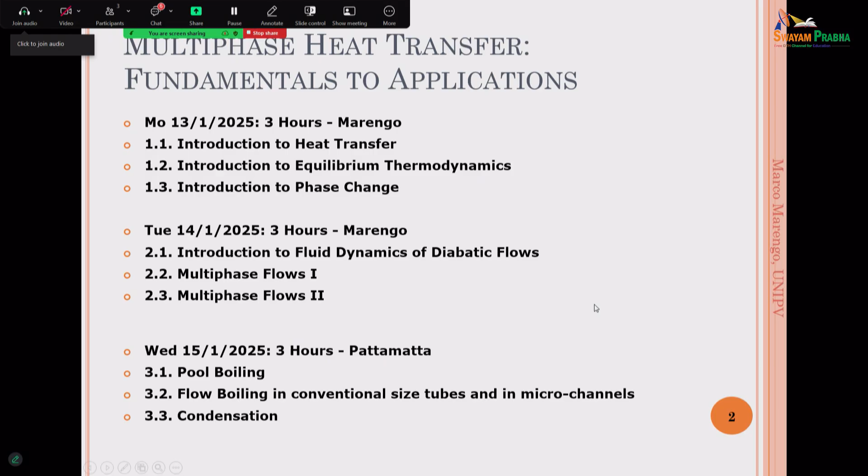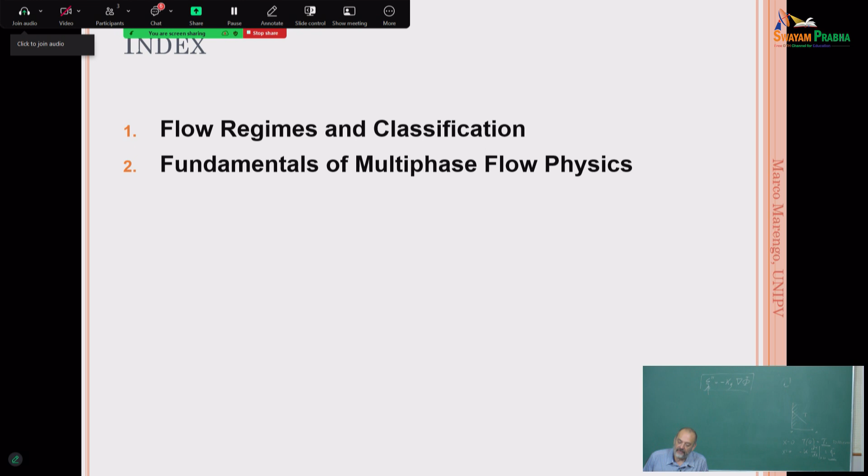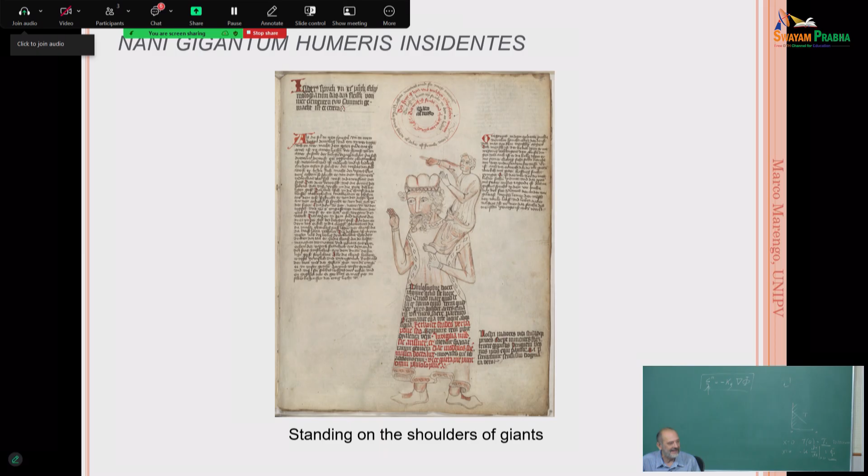So let's start. Very simple. The first lesson is about the flow regimes and their classification and fundamentals of multiphase flow physics. So this is a very important sentence in Latin, nani gigantum humeris insidentes, this means standing on the shoulders of the giants, in English, which is something that I like really very much.

You saw before I used the book of Lightfoot, Stewart, and Bird, and so on. In statistical mechanics, there is a book of Huang that is very, very good for me. And I think that every time that I'm giving lectures, I'm saying, where did I get these notions myself? Because I was a student, let's say, 30 years ago, but 40 years ago. So, okay, I was a student studying all this kind of stuff.

So it's interesting. What is happening here? Okay, in my computer I can see it.

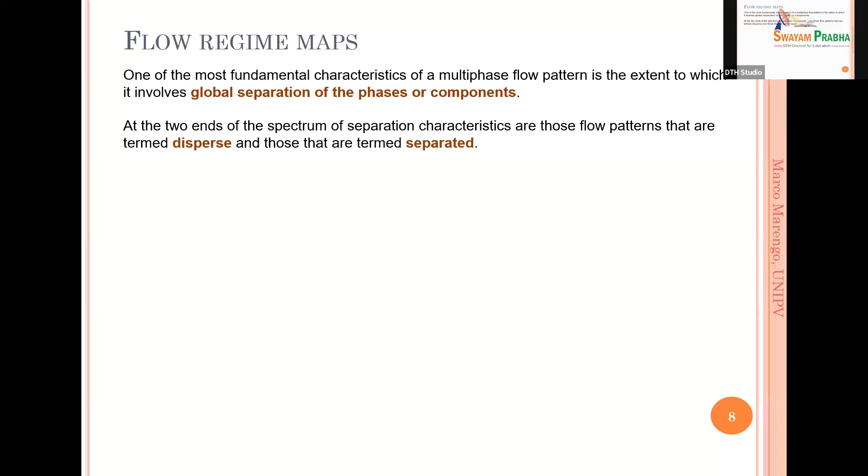So, about the first thing, we need to understand when we have different phases or components, the separation among the phases and the components. Okay, there is a large spectrum. You will learn, I was discussing this before during the break, you will learn that with multiphase flows, nothing is safe and secure and reliable 100%. There is always a kind of gray region of knowledge that we may have.

For example, the classical separation in multiphase flows is between dispersed and separated flows. But again, between these two ends, we have something in between, okay? So, we are starting with the complexity now. But the definition is very clear. A dispersed flow is a flow in which one phase is completely distributed and dispersed inside the continuous phase. So, for example, imagine to have solid particles that are floating in a fluid.

Or you have bubbles in a pipeline, or something. Or you have droplets, like in a spray. You are spraying droplets, and then these droplets are going around and so on, and they are exchanging heat and mass with the environment, with a continuum phase, okay?

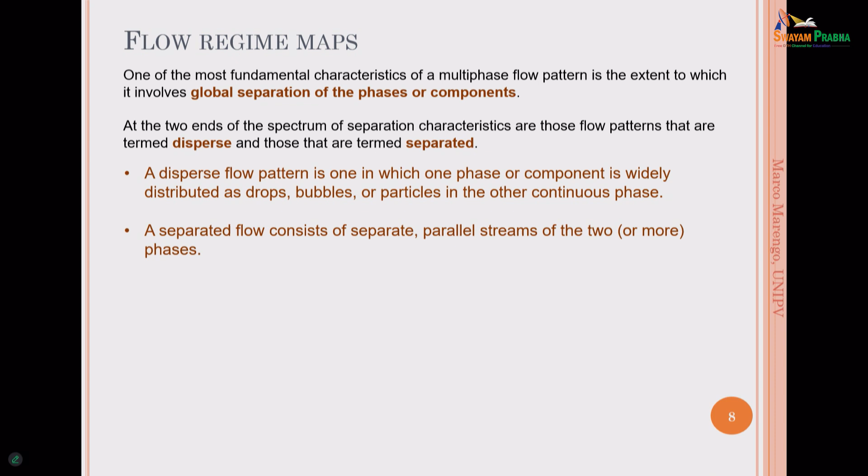And then we have a separated flow, for example, when we have two phases that are separated completely. For example, when we have stratified flows. So they are living almost an independent life. They are separated in this way. So we have a flow, for example, water on oil. So the oil is floating and the water is going in another direction.

And there is something in between, which is the interface, and we are going to study this on Thursday, okay? But apart from it, we can write an equation for the water and for the oil. But pay attention. This is a very simple distinction about the two phases. It's not so easy, okay?

In fact, what we can say, though, is that we have an asymptotic limit for the dispersed flows when we have a very large number of small particles. Okay, imagine to have a lot of nanoparticles in a flow. We can consider this as a single phase, homogeneous flow. Of course, properties will change.

So if you have nanoparticles inside the system, the viscosity maybe is not going to be the viscosity of the main flow because of the presence of the nanoparticles, the heat capacity, conductivity. But we can do an average, and we can consider homogeneous flows like a single flow where we have different properties. This is the asymptotic case of the dispersed flow.

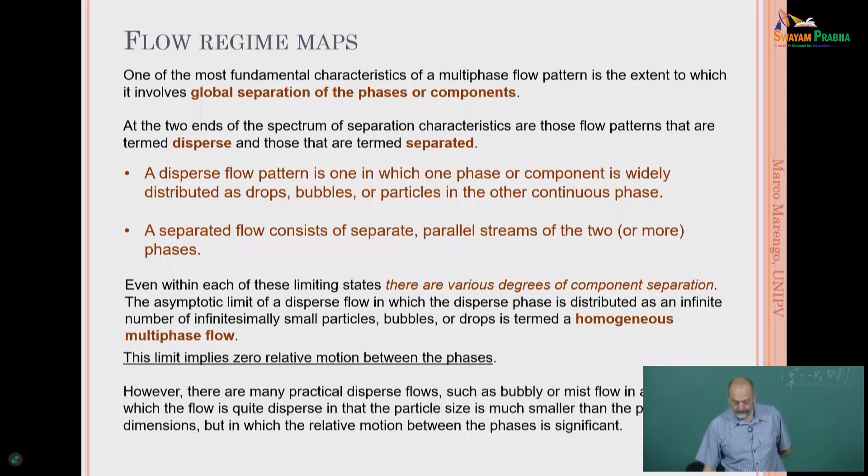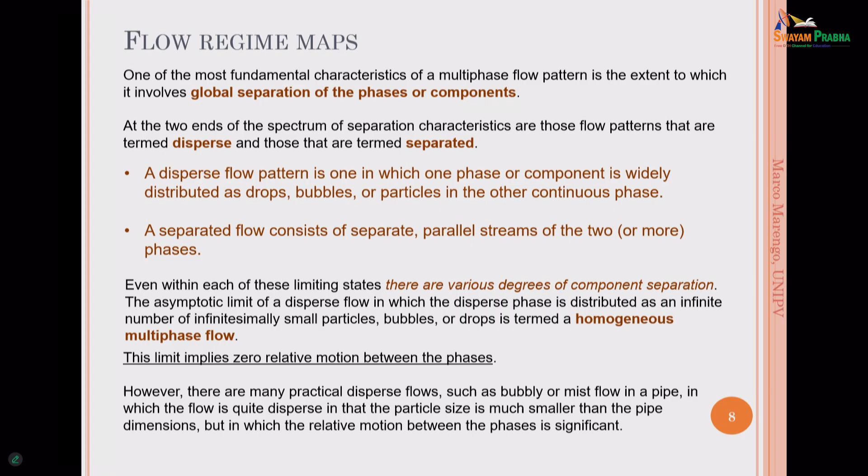In this sense, for example, this means that the nanoparticles are following the flow in all the points. So in fact, there is no difference between the velocity of the continuum phase and the velocity of the dispersed phase. So, as I said, there are different levels of separation. For example, I said about the water and the oil. This is a very typical example.

And for example, consider the so-called annular flow, we are going to see that. Annular flow means that, for example, we have liquid around the pipe, and then we have the gas that is flowing inside. And there is an interaction in terms of energy and momentum. Because, for example, the gas can create waves. And from the waves, we can create droplets that are produced by the movement of the gas.

Because there is, let's say, a tearing of the liquid in this way. Okay. So, is this dispersed or separated now, you see? Then it's becoming difficult. Is it separated? Yeah, it's separated because we have liquid and gas inside, but then we are producing droplets, right? So it's also dispersed. See, there are different degrees, okay? So it's always a little bit difficult.

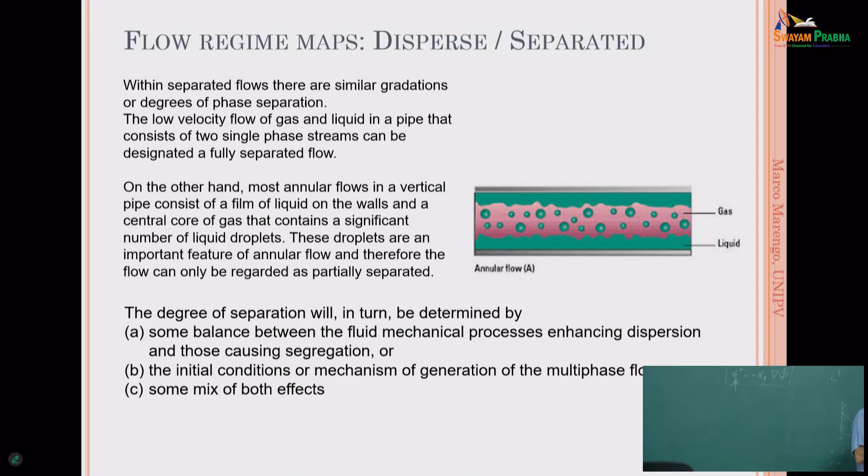But, for example, when we are thinking about a spray, we can say that a spray is a kind of dispersed multiphase flow, okay, with the droplets going around. So the degree of separation depends on at least three factors. Let's say two factors and a mix of the two others. One is the balance of the fluid mechanical processes of dispersion and segregation, okay? But also the initial conditions are very important, and the boundary conditions.

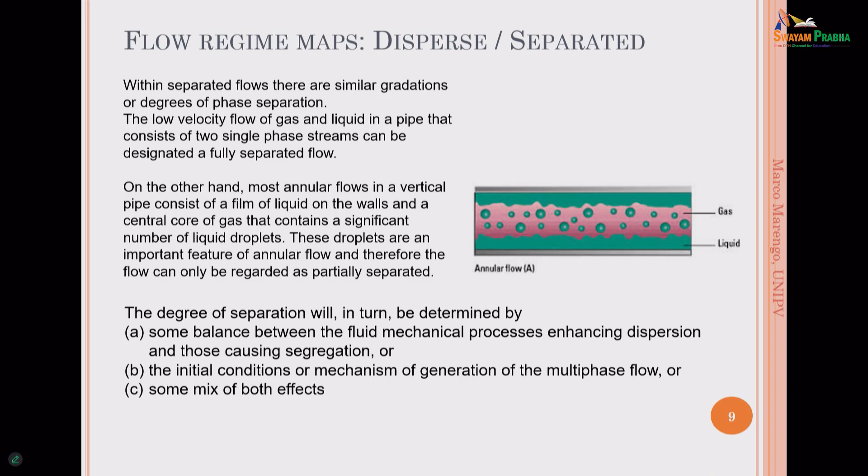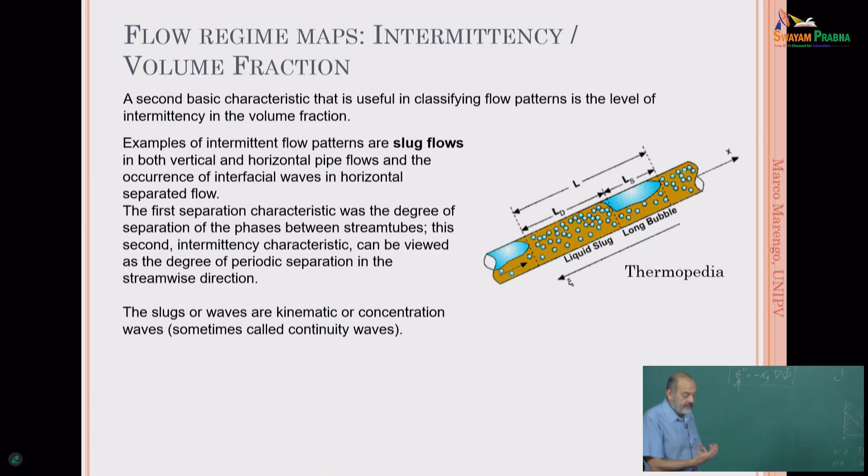The initial conditions in terms of generation of the multiphase flow, or the boundary conditions, again, in the generation of the multiphase flow. Then we have to consider another basic characteristic of multiphase flow, which is the so-called intermittency. Okay, so is it possible that the regimes are going to vary? For example, imagine having a big bubble, so we can say, oh, this is slug flow. So we have a flow of liquid with a bubble inside. Everything is nice, but then at a given point, this bubble is going to break, or we are going to have some other phenomena, okay?

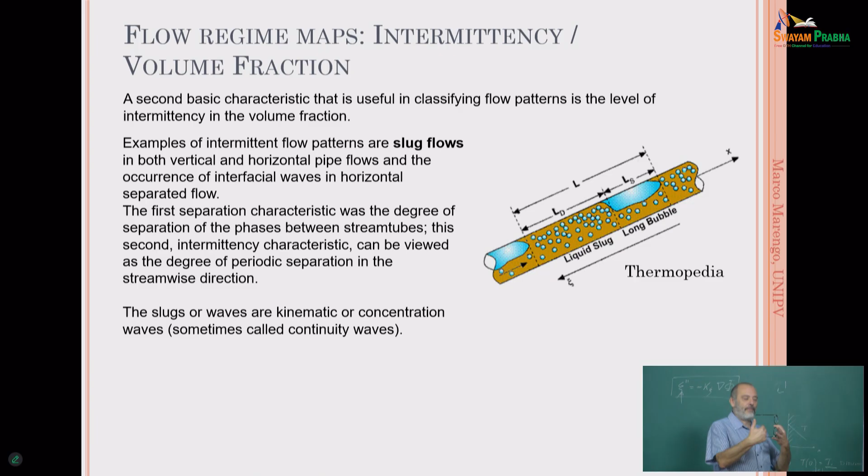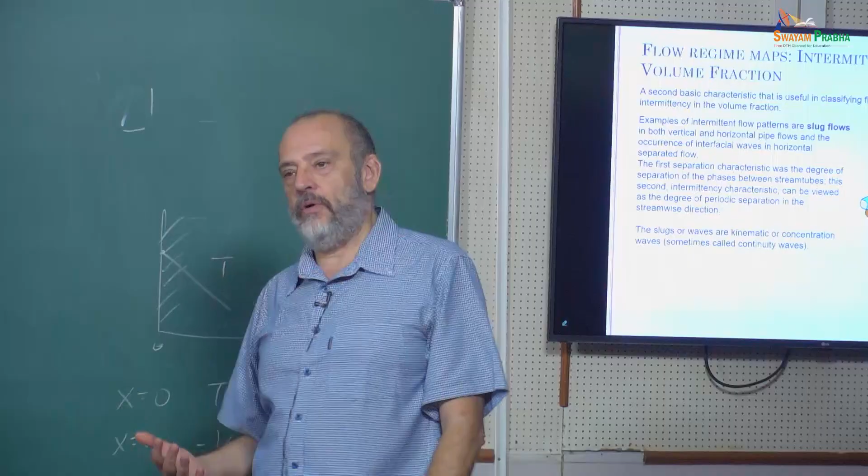A strong acceleration, sloshing, for example, which happens also for propellants, space applications and so on. We have sloshing. So what happens is that this nice bubble is going to produce a lot of bubbles, okay? So we are going to pass from one regime to another, and maybe back to the first one. So in multiphase flow, we can say there is one regime, and we are going to see these different regimes, but it's also possible to have intermittency. So we can have a time for one regime and a time for another regime, and vice versa. Okay, so things are becoming really super complex.

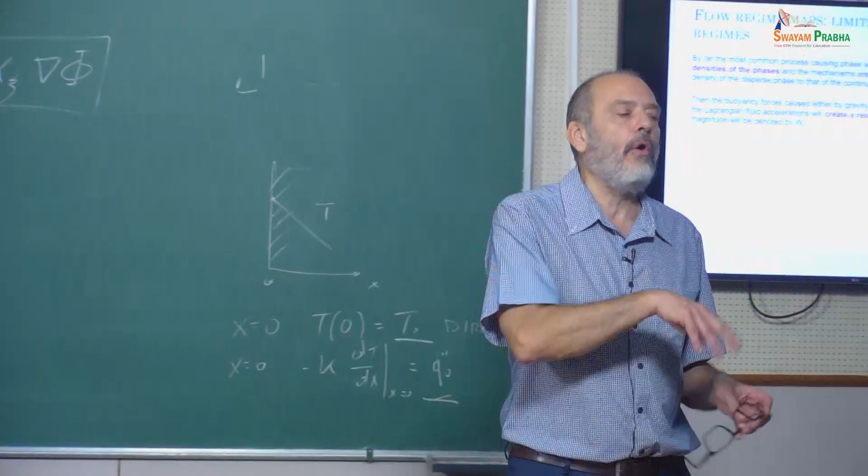Another point to consider is the fact that in many multiphase systems, we are going to have a difference of densities. Oil, water, solid particles and fluid, gas and liquid, and so on. But the difference of density, when we have an acceleration, or let's say a bulk force in general, gravity, means that we have a separation due to buoyancy. Okay? This is the reason we are doing a lot of experiments in microgravity, for example, in space, linked to the difference of densities, because of course, when you don't have an external force, things can change. Or maybe we can even better understand what is happening, because we are switching off one of the components of the momentum equation.

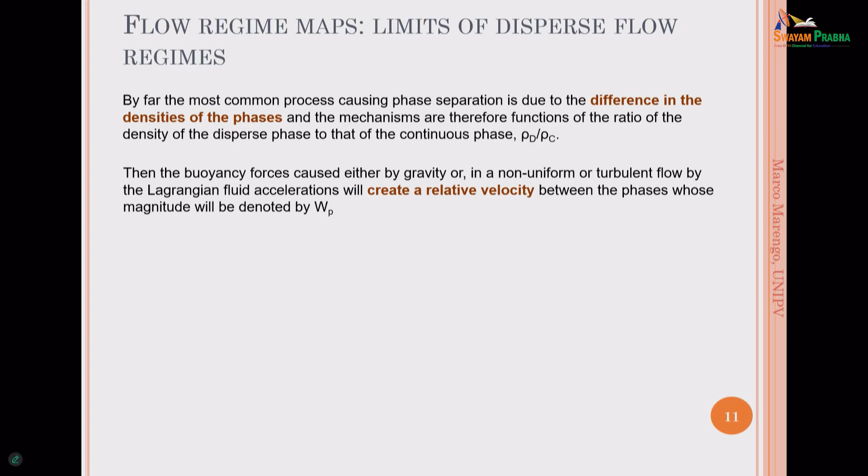And then there is another point. If you consider, let's say, a multiphase flow, imagine having bubbles inside the continuous phase, bubbles inside the liquid, okay? Liquid that is flowing. The bubbles can maybe expand or they can contract. So you are creating local accelerations. Okay, so we need to consider an equation that is much more complex with respect to what we had before, because it needs to consider the interaction between one component and the other.

So remember, we did these shear stresses in the first hour. Okay, fine, it was good. Complex, but okay, more or less we understood. But now if we have another component, bubbles, particles, and so on, the particles can cause another stress. For example, imagine that you have solid particles that are going to rotate inside. This rotation is producing a vortex. So it's producing extra stresses. We need to try to understand how we can deal with the extra stresses linked to the fact that we have another component. It's becoming quite complex, right?

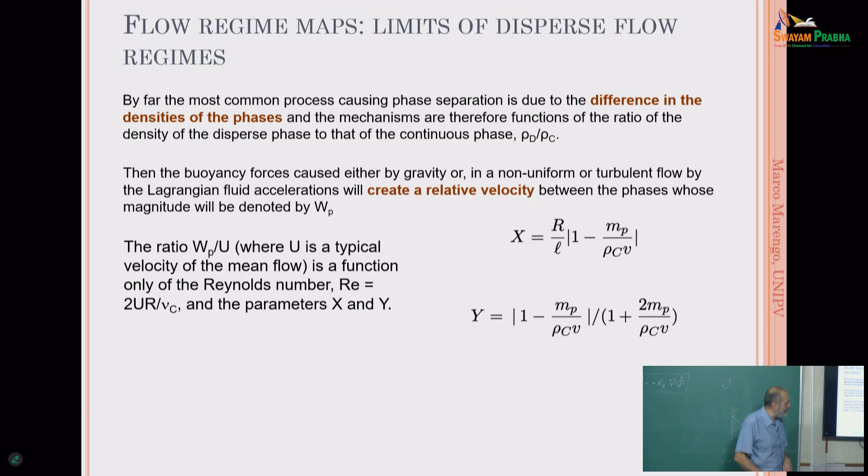So we have a relative velocity, okay? For example, if you consider a relative velocity WP, the ratio of WP with respect to the mean flow velocity is a function of Reynolds. Here we are writing it in terms of U multiplied by the diameter of the bubble or particle, whatever, and these two parameters, X and Y. X and Y again contain the mass. R is the particle size, and MP is the mass of the particle. L is the characteristic length, for example, of the nozzle, and V is the volume of the particle or the sphere that we have.

Okay, so then, let's say, the asymptotic condition. I have no time to enter this field, but let's say that what will be interesting is to understand how local accelerations of the dispersed component can influence the relative velocity, the mean relative velocity inside the flow.

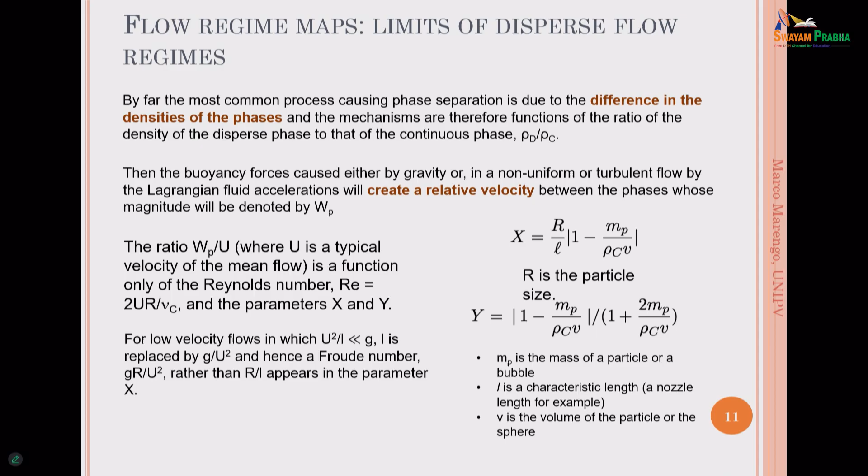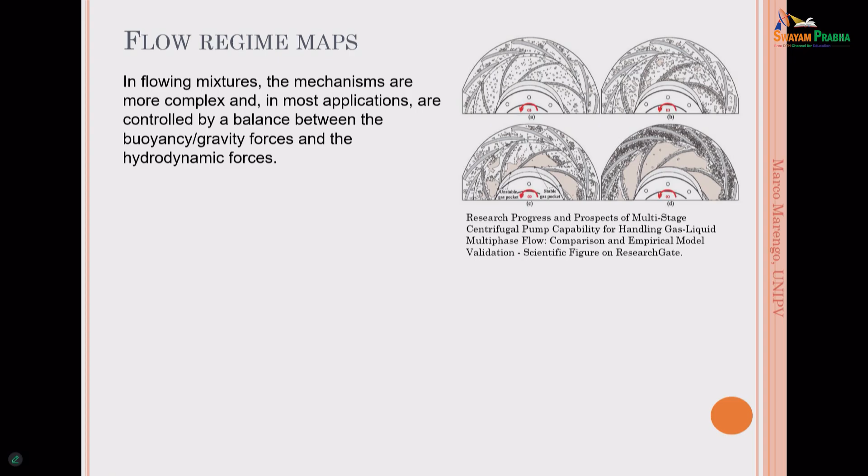And so, as you can understand, we have buoyancy and we have acceleration because of the different density. Well, we can use this information, saying that, for example, when we have different conditions in terms of density, we are going to have segregation of the particles, the bubbles, and so on.

For example, if you consider something that is rotating and we have solid particles, a solid particle usually has a density that is bigger than the density of the continuum phase. So imagine you have in a system solid particles, in a fluidized bed or something like that, and then you have a gas inside. If we put the gas in motion, creating a vortex for example, it's very clear that because of the centrifugal force, the particles are going to touch the wall. It's a cyclone system.

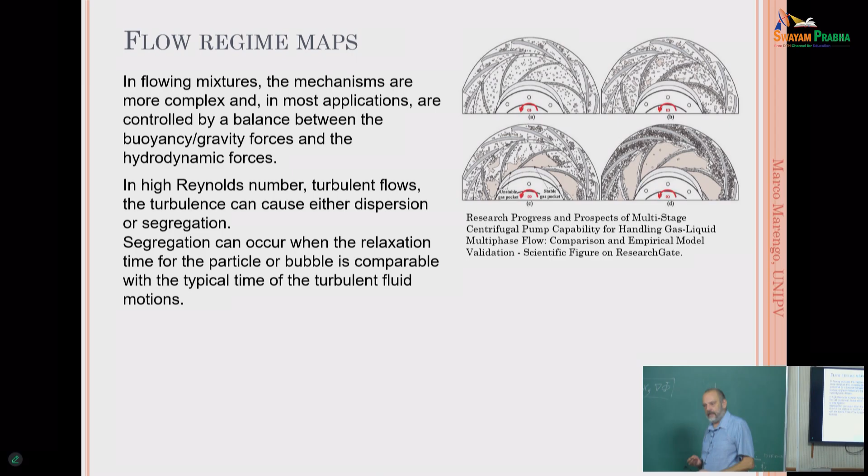This is interesting. If the density is different, for example if the density of the particle is smaller than the density of the liquid, when we create the vortex we are creating another situation. We are almost obliging the bubbles, in this case, to construct forms, because they are going to aggregate themselves. So you are going to construct forms like you saw here, where this is interesting because this is the velocity of particles inside, in atmospheric flow.

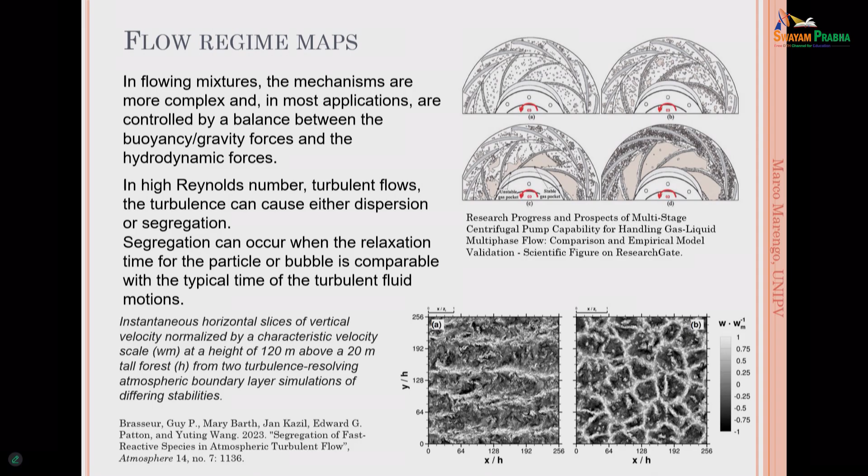Atmospheric flow is a multiphase system. It's very complex, with a lot of different things. We spoke about something that is rotating, so the solid particles going to the wall. The bubbles are going to build structures because the density is lower than the continuum phase. And when we have characteristics like what we have in the atmosphere, we are dealing with turbulence because the dimension is very big. So in this case, we have structures like that. We are forming clustering of the dispersed phase.

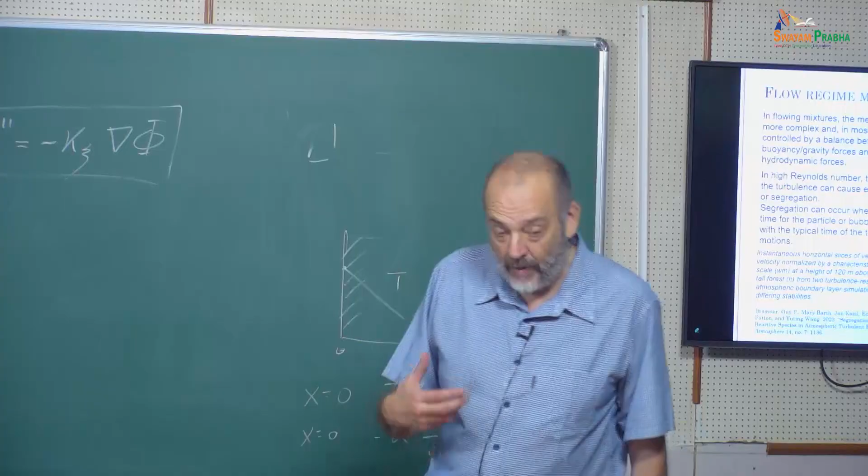And there are a lot of studies about this kind of situation, where we can see really what is happening. Another point, we said it already but it's better to repeat: the particles have an effect on the turbulence level. We are going to see this later on. So there is an interplay between the two phases, and it's quite difficult to understand what is really happening.

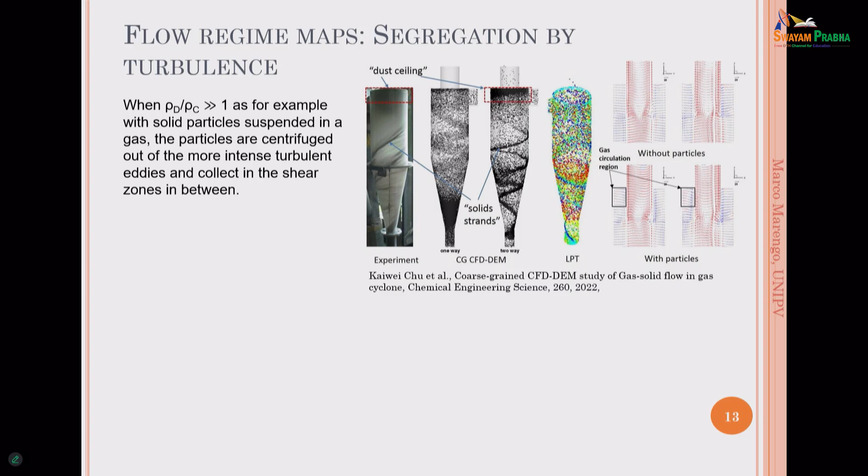In fact, for example, this is the classical condition, as I told you, of particles in a cyclone. And you can see here that the particles are going to form, and you have different conditions. You can also try to simulate what is happening in this cyclone. We have a gas circulation region, we have a region without particles, and so on. For example, with cavitation, the formation of the bubbles is changing the characteristics of the motion of the flow.

So these are already quite complex situations to study. They are changing the turbulence level, the turbulence intensity. So as you can understand, it's quite complex. You can see other material here if you want to know a little bit more. The formation of the bubbles is interesting because of cavitation, for example, and on the opposite side we have formation of condensation, formation of droplets. Again, they are influencing the turbulence level and so on.

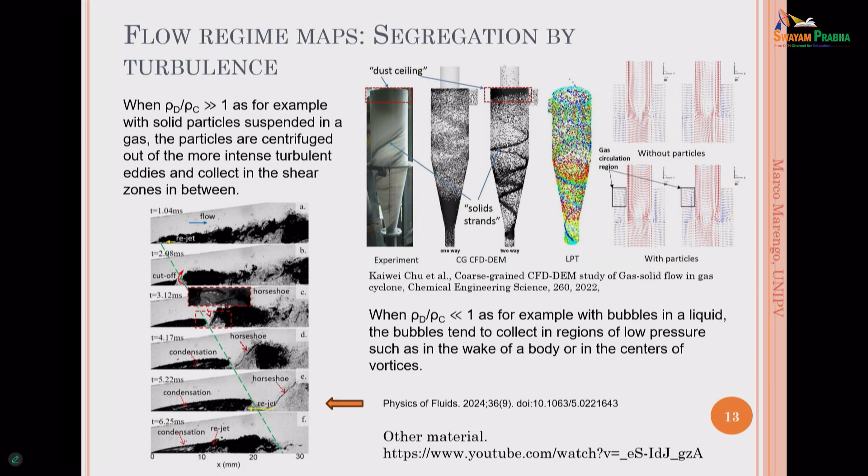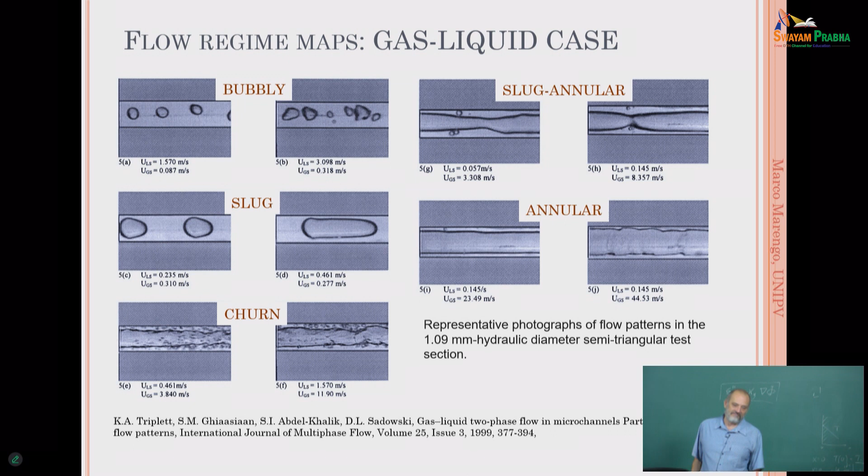Then we have churn flow, where we have what we saw before. So it's a kind of annular flow, but we have a lot of bubbles going around. So it's a mixture. Here the separation between the two phases is a little bit more complex. It's difficult to say if it's separated or not.

Then we have slug and annular. So we have the slug, where we already have the gas inside in the form of bubbles, where the velocity of the gas inside is pretty small. But then we have annular flow. Annular flow means that the gas inside has a given velocity, and the liquid film may be dragged away because of the motion of the gas.

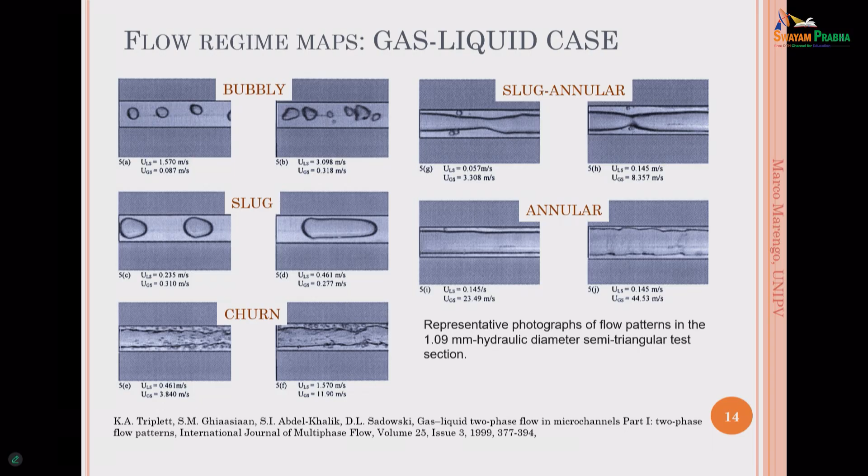So this is the classical picture of what is happening. In this case, it's a very, very small channel, because it's a channel of 1 millimeter. I put this one and not other cases with the bigger pipes, because really I wanted to stress the fact that multiphase flows are really a multi-scale problem. So we can pass from, let's say, 100 nanometers.

I know a guy in Paris that is studying the flow in nanotubes. So the flow in nanotubes. A little bit difficult, huh? So he's putting a tube, a nanotube, and he was able to have the flow and visualize the flow that is going outside. And he was also able to measure the pressure drop. So what? It's not possible to have, let's say, a manometer, a gauge, no?

It's not possible. But he did this because he had an idea of the velocity of the outlet, because he measured the cone of the fluid that is going outside. From the dimension of the cone, it's possible to do some numerical simulation and to extrapolate the velocity at the entrance and the exit. So it's possible to understand the difference of pressure. So it's a nanoscale phenomenon. The nanotubes were about 20 nanometers, so small, but then we can have also big pipes. So it's really completely different, meters.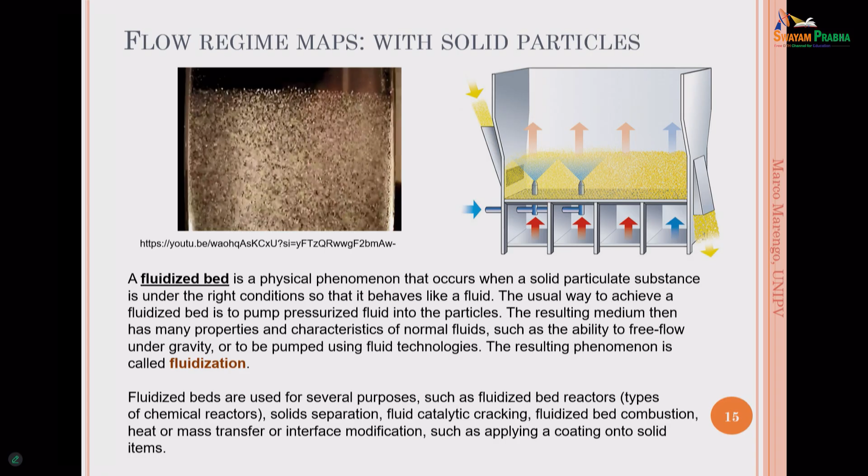In this case, the fact that we have so many particles is saying that we are already in the direction of a homogeneous flow. So we could consider this system as a single phase, but with other properties. Okay? Of course, if you want to study, for example, the turbulence in a turbulent situation, here it is quite complex because, of course, the particles have an influence. So many times what we are doing, not we because I didn't do simulation on that, but what my colleagues are doing is to put coefficients.

And with the coefficient, you need to arrange the viscosity. So instead of having viscosity, you have something else. Usually it's a Newtonian fluid, at least. Usually Newtonian fluid, but then you need to change, let's say, the value of the viscosity in order to fit with the experimental data, for example. It's not possible really to calculate how much is the viscosity for all these kinds of situations. And so you have different conditions and so on.

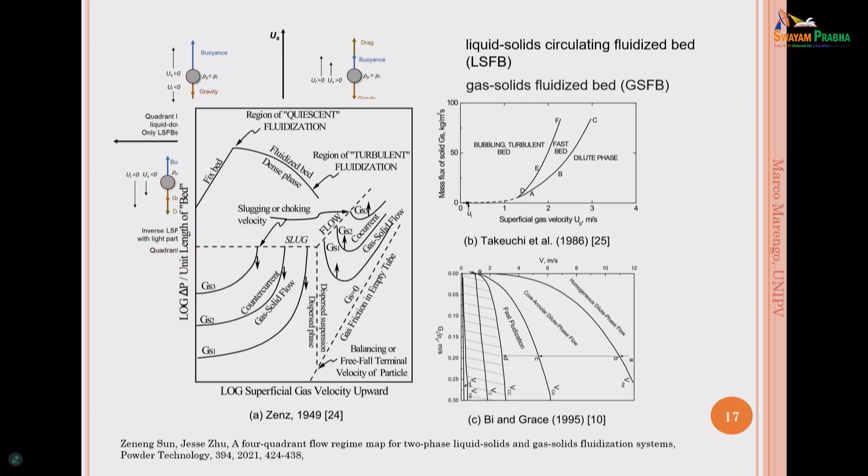This is a paper, for example, on the gas-solid fluidization system in powder technology, and you can see that for different conditions and so on, we are working since, look at this paper, 1949, and here is Takeuchi, 96, 86, 95, 2021. So it's so complex that we're still looking for solutions or looking at very good simulations. And this is happening for all the multiphase flows. There is no, let's say, perfect solution. We are always trying to refine something that was done in the past. This is the reason why it's so important as a field. So you can do a lot of different things.

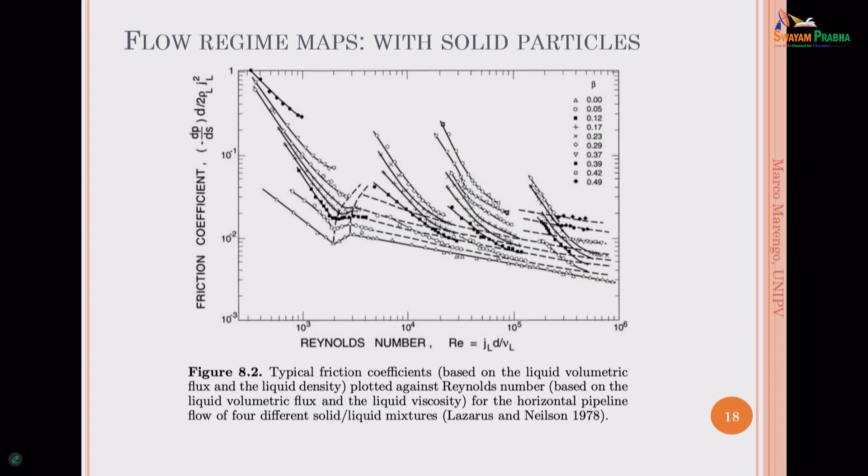Well, in the case of solid and liquid, this was solid and liquid, depending on the dimension of the particles, beta is representing the dimension of the particles, you have different conditions, see? So, in fact, there is a very strong influence on the friction coefficient due to the presence of the particles inside. This is interesting, and this is not a numerical work, it's an experimental work, and only to replicate this graph numerically, wow, is something. It's not easy at all.

Okay, this is a very short introduction in order to understand what we are speaking about. The introduction was really about dispersed and separated flow in order to have the same vocabulary.

Now we enter into the physics.

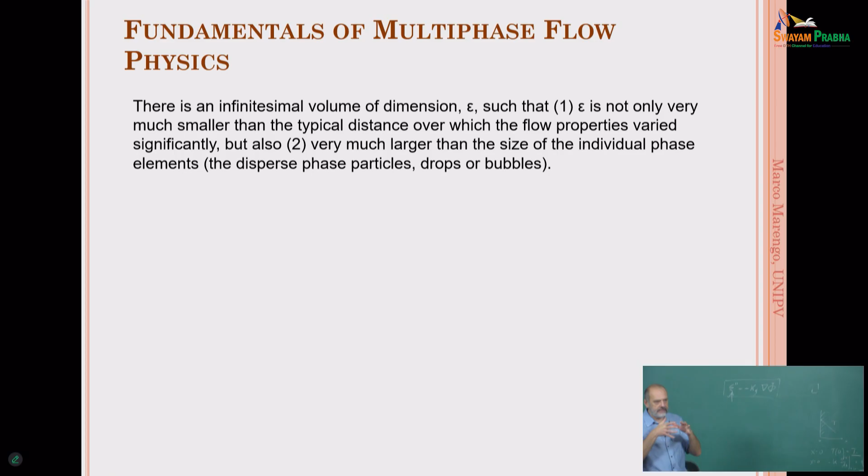We saw that in order to build the mass conservation equation, the momentum equation, the energy equation, we use the concept of having a small volume. We said, okay, we have a small volume, delta x, delta y, delta z, and we did the balance on this volume. Before, it was a single phase. We take a volume, delta x, delta y, delta z.

We know that we have air, we have water, whatever. Now we put inside particles. And the problem is that epsilon cannot be everything.

We would like that the properties of the flow, the volume must be very small in order that the properties are not changing so much. But also the volume should contain enough particles in order that we can understand the effect of the particles.

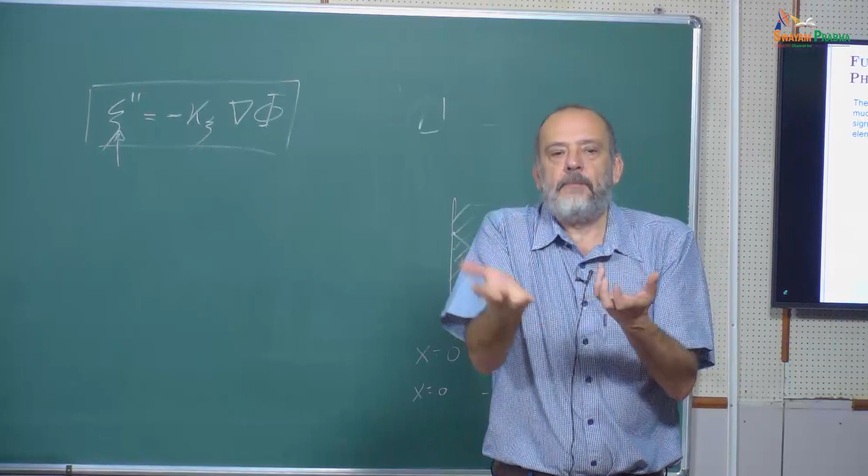So when we took the volume before, inside of this volume the temperature was this one, the pressure was this one. So this was large enough to contain enough liquid, in terms of molecules, to determine the property of the fluid, but the properties were constant inside the volume.

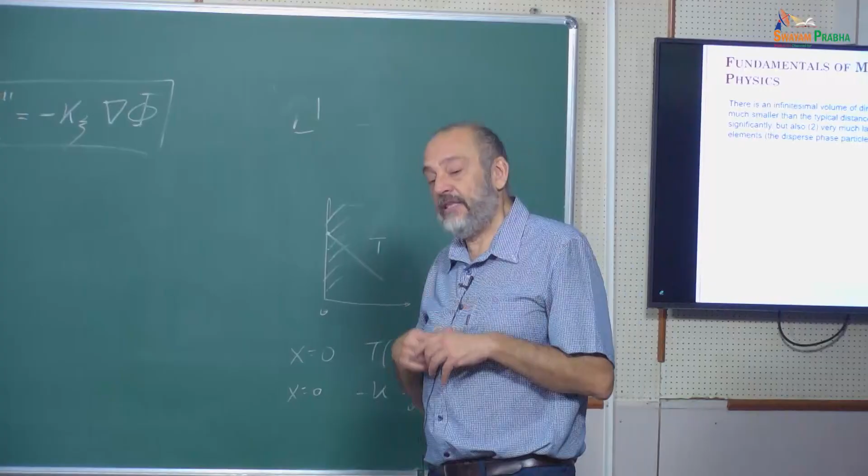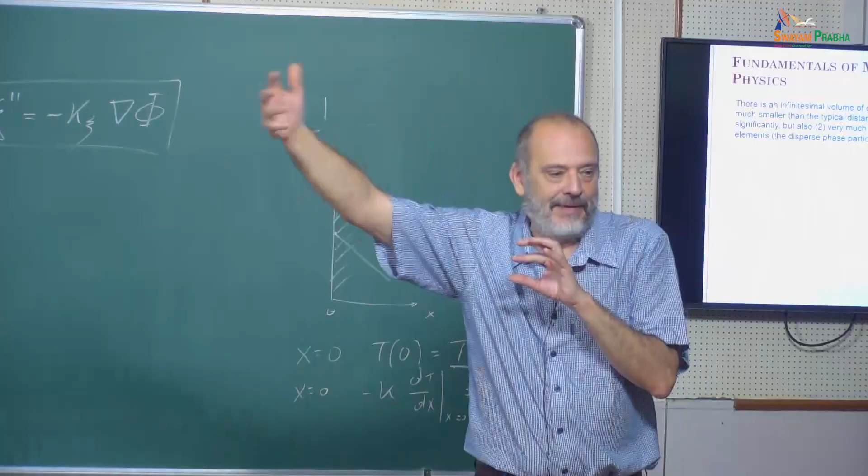When we put the particles inside, we have the problem that we also need to have enough particles. If we have a very dispersed flow and a small volume, but only one droplet, well, this is another case - it's a study of maybe the oscillation of one droplet inside the volume. But this is not the volume we need to consider for this kind of equations. So this is the first point.

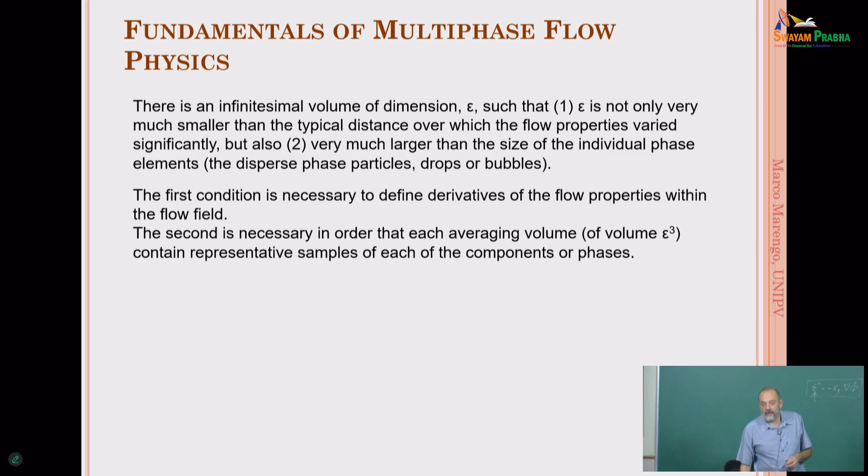The fact that the volume is small enough so you have constant properties is important in order to have smooth derivatives for the flow. And the second point is important to have enough samples of the dispersed, the other component.

The point is that it's very difficult, since the second component, for example with respect to the first one, has an influence - this interplay, this interaction is important because it's changing the properties even in a small volume.

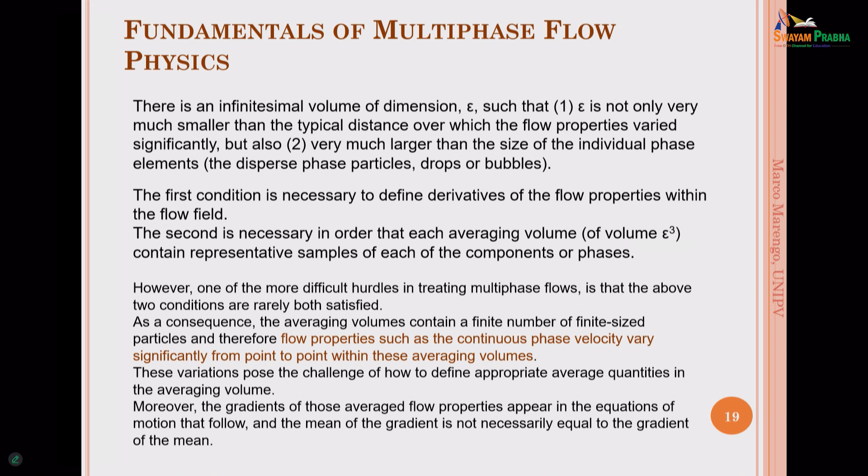So in fact, in multiphase flows, many times we are speaking about average quantities - average densities, average velocity. So it's quite difficult to have one single value that is good for both the condition of enough big or enough small volume. So even the choice of this volume with multiphase flows is becoming a little bit tricky.

One can say, well, okay, but at the end you are going to write the equations. Yes, but when you're doing numerical simulations, you are going to notice that this is a big problem - how big should be the cell size? Then it's becoming a problem.

You need to have a cell size that contains something - maybe if you are doing Euler simulations, you need to have enough droplets or bubbles in order to have an average property which is constant inside the mesh size. But this again is not obvious for other conditions. So this reflection is important as a consequence for the numerical simulations.

For notation, we are going to have the continuous phase C, the dispersed phase D - of course liquid, gas, vapor, and solid, very simple. Then we are going to use J for the volumetric fluxes, and in the I direction the flux is going to be the sum of the different contributions of the fluxes.

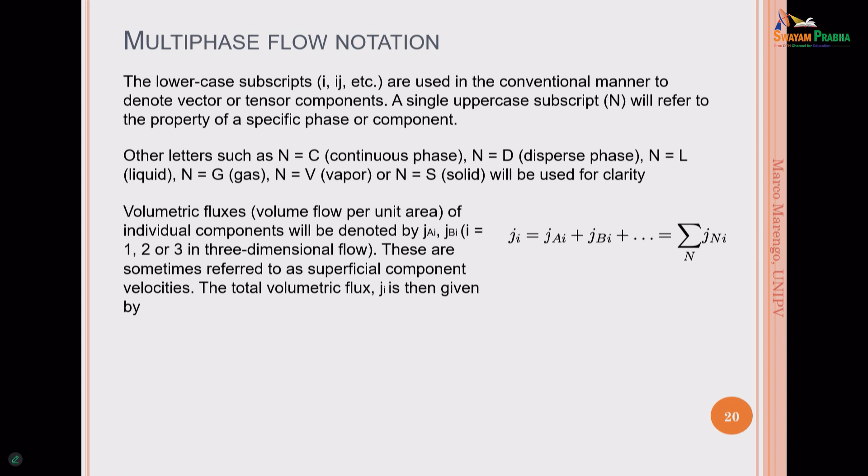And we have also the mass flux, we are going to use the letter G. So the G of component A in the I direction will be rho A times J I A, and so on. I think that is clear enough.

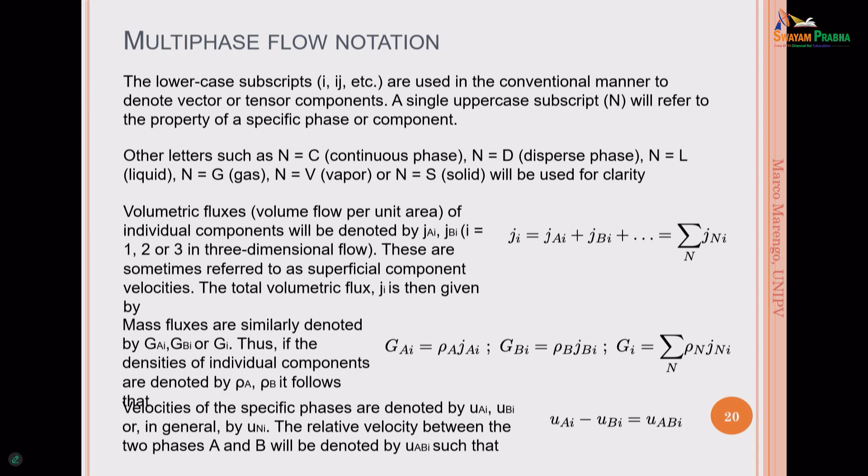And then we have the relative velocity. So in the direction I, we are going to have the difference between one component and the other - U A in direction I minus U of the other component B in direction I. So we are talking about relative velocities.

One concept that is very important is the volume fraction, that we are calling alpha n. So imagine to have, let's say, two components only, A and B. We are saying how much is the volume of one component with respect to the other.

So this means that what we wrote in terms of J, we can write something like alpha n U n I. So the total volumetric flux will be alpha A, U A, I, and so on, the sum of all the components of the fluid. And this is also important: it's the ratio between the volume of one component with respect to the total volume.

And so using this concept, we can write also the mass fraction. But I'm going to use, I think everywhere, the volume fraction, I'm quite sure. So I'm going always to use alpha to know how much is the fraction of the volume of one component with respect to the total volume.

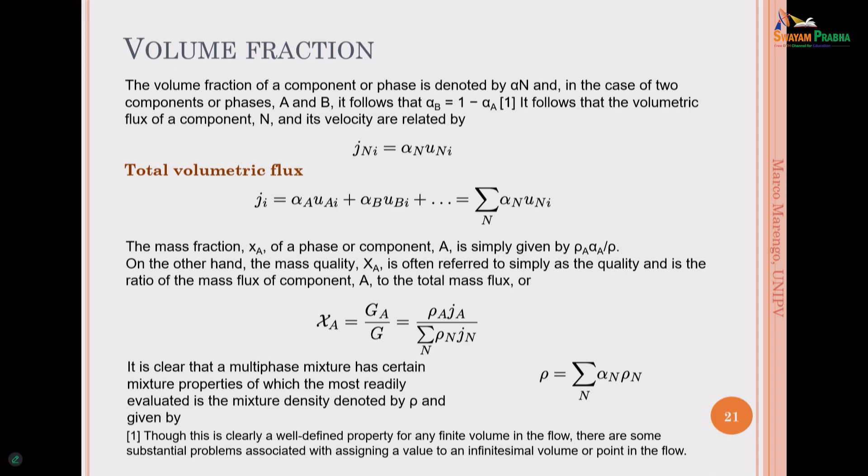I don't know what's happening because I checked this morning and I don't know why there was a different position. I think that when we translate from Mac to this one, I don't know. But okay, it's not important.

Now, we need to write the equation of conservation using the concept that we saw in the previous lecture: the mass flow of a component can be written like the rho of the component n for the volumetric J, in the direction that we are choosing, in this case the direction I, the xi. So this is the net flow, and we can write the classical conservation of the mass. I'm not repeating the demonstration, but it's just what we have done before, in the hour before, just that.

However, when we write down this, we are landing with one term, that is the mass interaction term. This is already a big change. Why that? Well, we need to conserve the mass, and we have a flow. We know that the equation is the equation that we wrote before for the single phase, only that, so we have equals 0, or we have the mass that is going to change inside the system, right? The rho over the t was like that, right? So we can write also the total derivative.

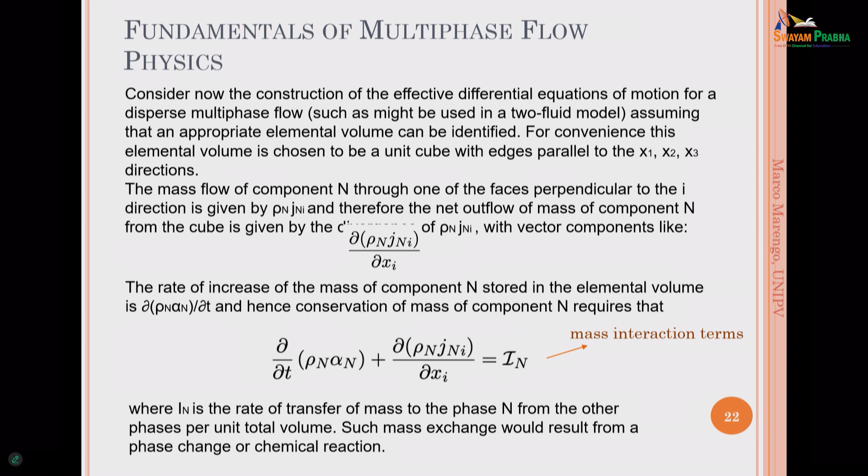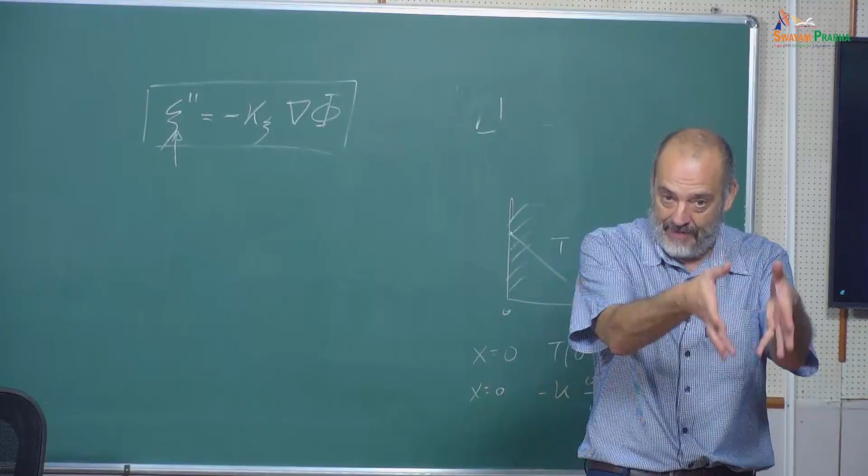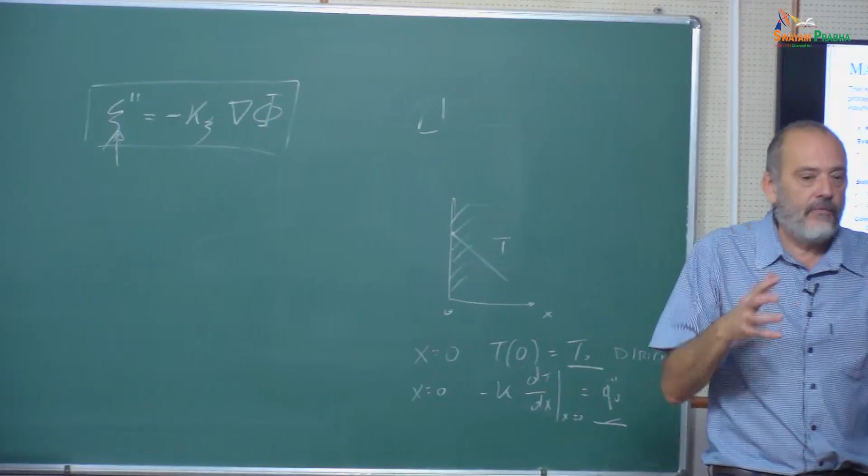In this case, why do we have a mass interaction term? Well, because in a two-phase system, we may have a mass exchange due to the fact that we are going to have phenomena inside that are transferring mass from one component to the other. So the mass conservation is going to change because we have these new things. So we are going to have evaporation, for example, boiling, condensation, sublimation. Imagine to have dry ice that is going inside the gas. Of course, we have sublimation of the dry ice.

So, in this case, the mass interaction terms are really very important because they are saying the rate of mass transfer into or out of a phase n that we are considering. The mass interaction terms, as you can see from the equation here, it has the dimension of the density over time, so kilogram over cubic meter per second.

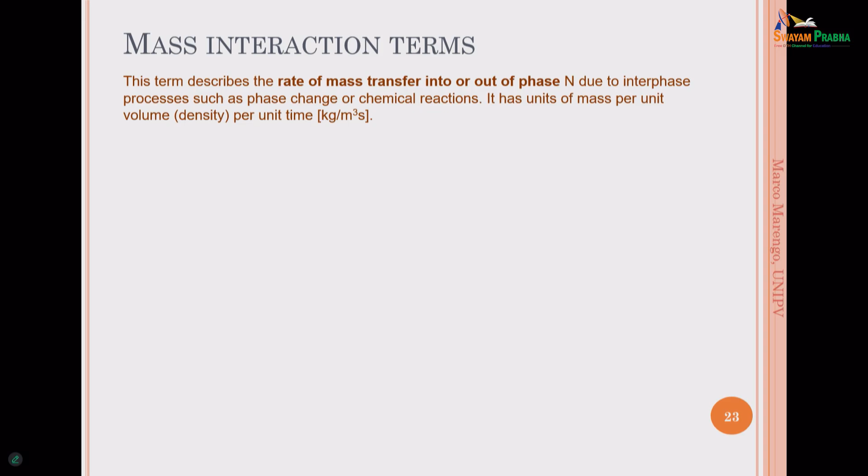And this, again, very important because in two-phase flows, we may have this kind of phenomena. Or, for example, we can have chemical reactions. Also, the chemical reactions are changing the mass of one component with respect to the other. Or we have dissolution, or we have interphase diffusion, so one phase that is entering the other. For example, we might have a liquid and we may have a gas, but the gas is going to be dissolved by osmotic diffusion. It can be dissolved in the other one.

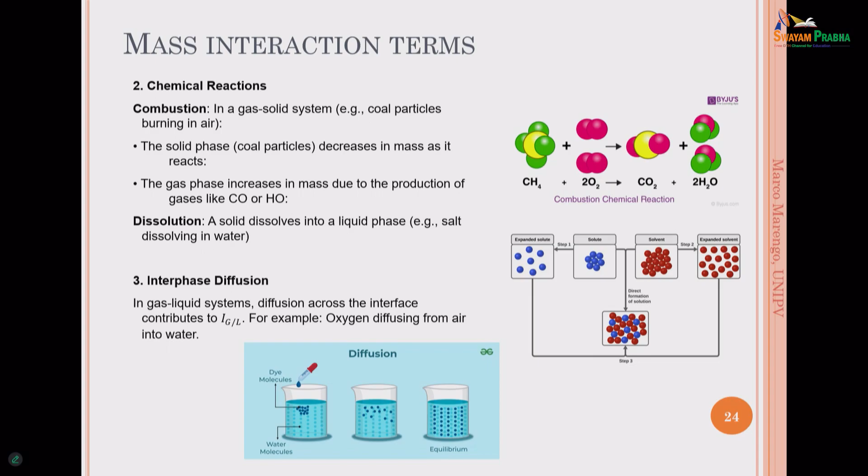Well, this means that we are changing the mass because there are these terms to be defined. At the moment, you don't know, but okay, you will see. Do you understand the big difference? So, for the single phase this doesn't exist. For two phases already, or three or four, it can change a lot.

So, this equation is called the phase continuity equation, because we are considering the different directions. But it's very clear that if you are considering the system, and the gas is going to the liquid because of condensation, or the liquid is going to the vapor because of evaporation or boiling, whatever, what is happening is that the total mass should stay the same, at least. So this means that the sum of all the mass interaction

terms over all the components must be zero. So this means that if we are summing up everything, we are landing with the final equation where in fact we have the variation of the density inside the system equal to the gradient of the mass flow rates, considering the volume fraction, and here we have a summation. So we have all the components, and here now we have a zero, because we sum over all the components.

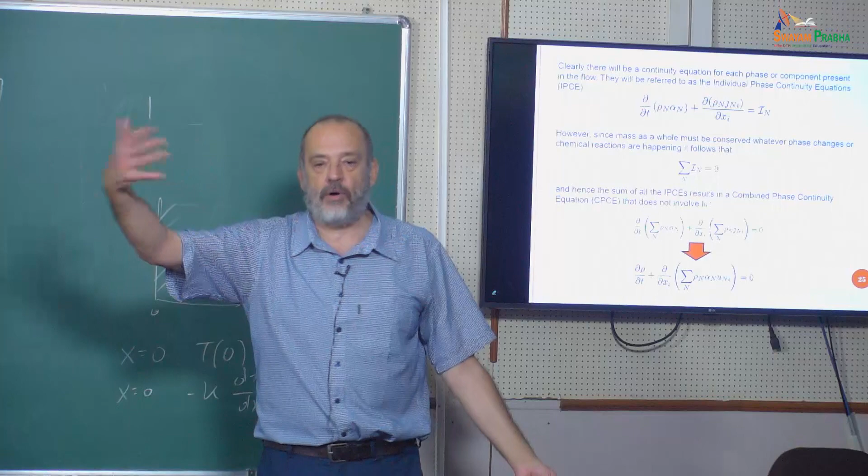Okay, so, and already you can see that we can even consider, let's say, average values. We can have also a condition where we don't have this. We could check if the particles, in fact, are staying, let's say, with the same number, if we have also to follow the number of particles. I'm not doing this.

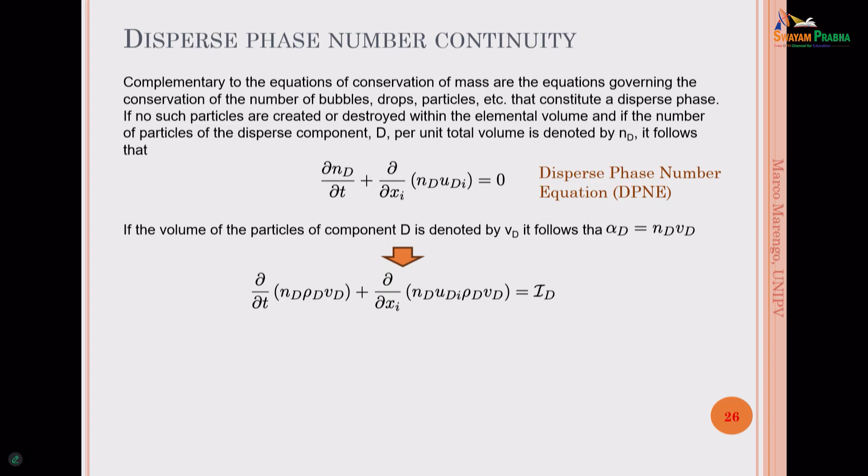Okay, momentum conservation. I don't have time to derive all the equations. This is becoming really too much, so I'm going to write the equations and describe what is happening, but I don't have time for the derivation. I'm sorry for that. It's very close to what we did in the first hour, only that now we need to consider the different phases. But in principle, it's very similar.

So let's consider a dispersed and a continuous phase. It's very clear that we need to write this expression considering either one or the other, not and. I mean, we consider one continuous phase, we say this is the continuous phase, gas, and we're writing the momentum equation. Droplets in this case, and we are writing the momentum balance. So one and the other, but we are not putting them together. Separate. This is important to say.

So we are doing the same thing that we did during the first hour. We are doing the balance, using the momentum conservation principle, and landing with something you can recognize. At this point, you have the rate, the variation in time of the momentum for the nth component, written in terms of the volume fraction, because it's rho N alpha. And here you have the gradient of the momentum flux. Until now, it's fine.

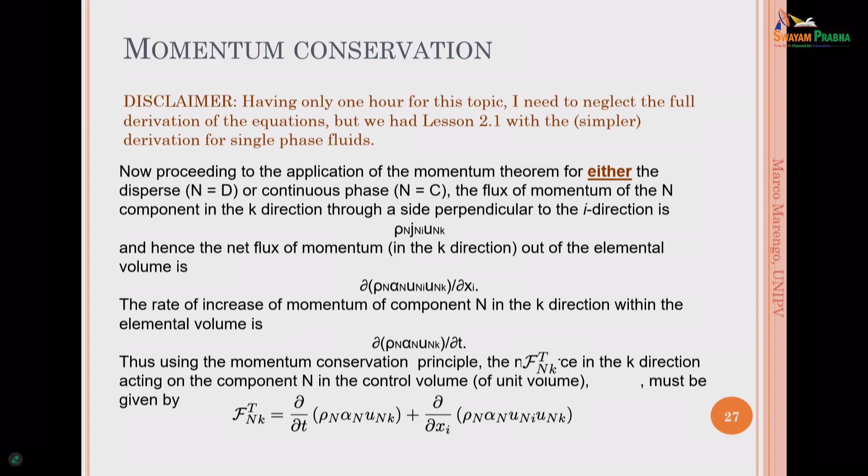Of course, this is giving a value that we know must be equal to the force. Now the trick - this part is known somehow, it's not difficult. Now the trick is to define what we have here. So which is this force? There are many different contributions to the force. Let's start with the simplest, an external force. We have gravity, centrifugal forces, electromagnetic forces, and so on. So external forces.

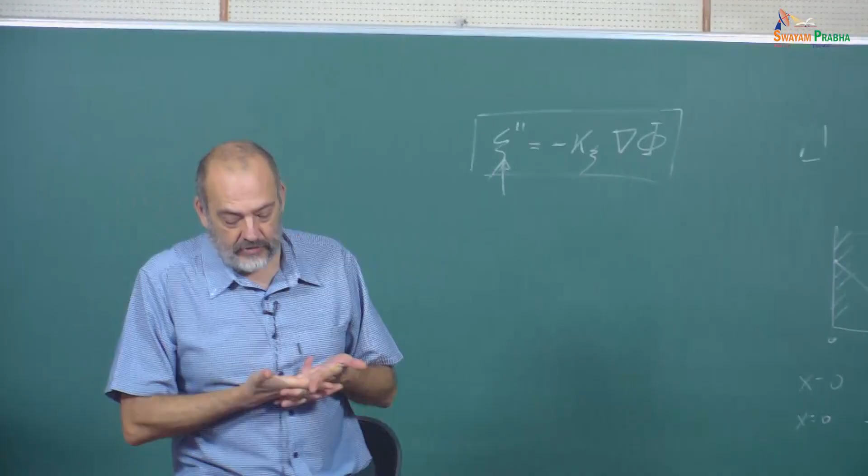The second contribution is due to the traction on the control volume. This is what is happening when we have water and oil and we have a traction - a shear stress due to the presence of one component with respect to the other. This is the second contribution. Then the third contribution is linked to the force that one component exerts on the other component. So this means stresses, let's say.

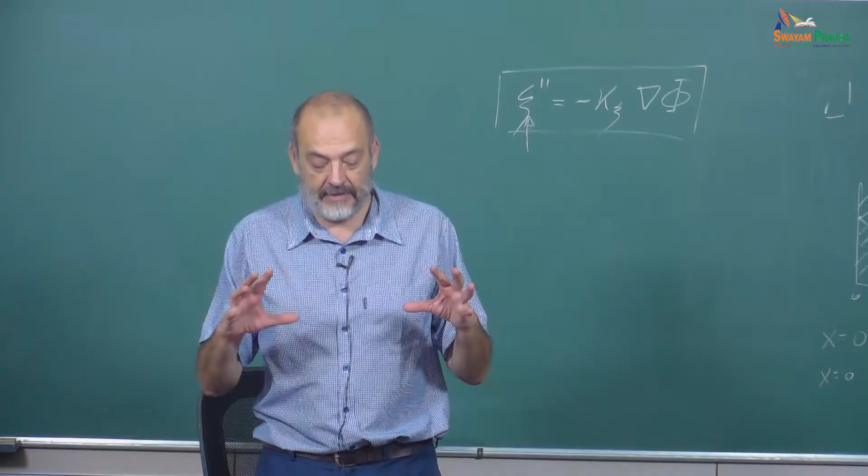So at the end, what we have at the beginning is something like this: this term, the total derivative of the momentum flux, is equal to the force linked to the external forces. Then we have the pressure, and we have the shear stresses. Now let's see - we are speaking about the stresses. The delta here is again a delta, not the Kronecker delta, but another delta. I'm using delta D and delta C: delta D is 1 when we have a dispersed phase, and delta C is 1 for the continuous phase. Remember, I wrote this for either the dispersed phase or the continuous phase. This is the so-called individual phase momentum equation.

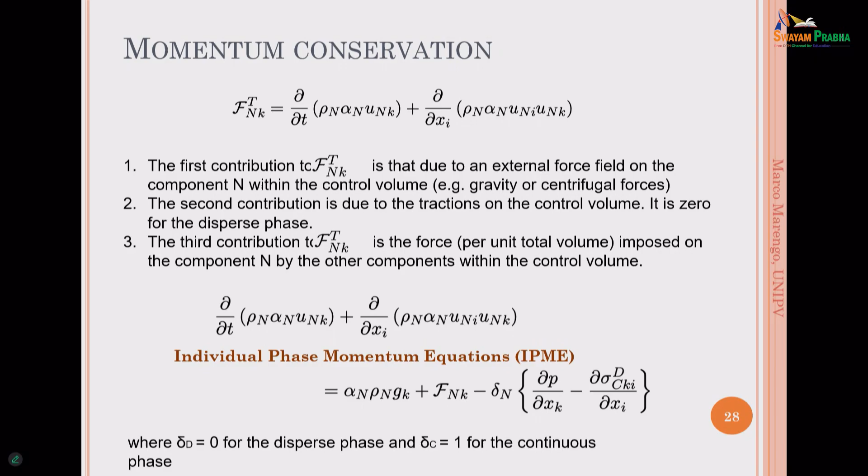So now, if you are using the mass conservation, we get the term linked to the mass exchange - evaporation, boiling, condensation, and so on. So without demonstration, if you consider that equation and put it inside the IPME, you obtain an equation that is plus or minus very similar to the first one. Of course, there is a change - there is a change here in this part, but you are going to land with this term.

If you see, it's the mass that is changing - the interaction term multiplied by the velocity of component n in the k direction. So you're landing with this term, and the first part is the classical total derivative. On the other side, you have this term that is a little bit puzzling but very important, because it gives the variation of mass for one phase with respect to the other due to phase change, multiplied by the velocity. So imagine a droplet that is evaporating - you have evaporation from the droplet, so mass going out of the liquid droplet into the gas, and this is transporting momentum.

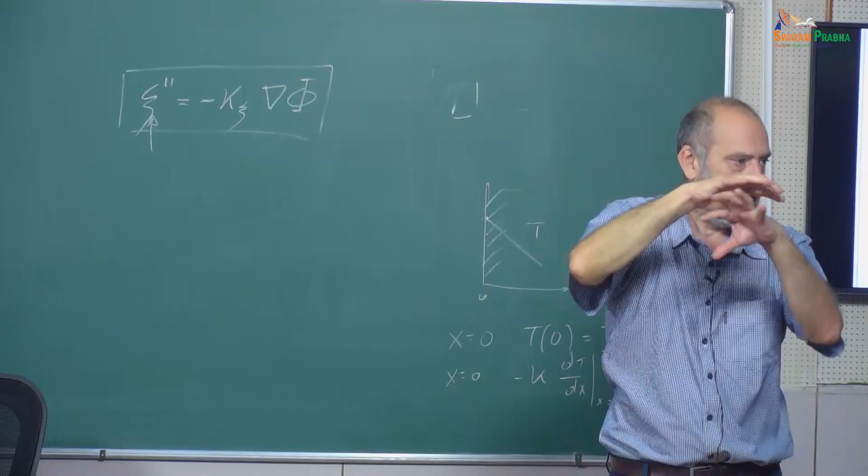As you know, maybe someone knows about the Stefan flow, maybe. It's okay, it's not important to know. But I mean, there is a transport of momentum due to the fact that we have mass that is going to move. Okay? This was not existing before. This was not existing for the single phase. Did you get my point?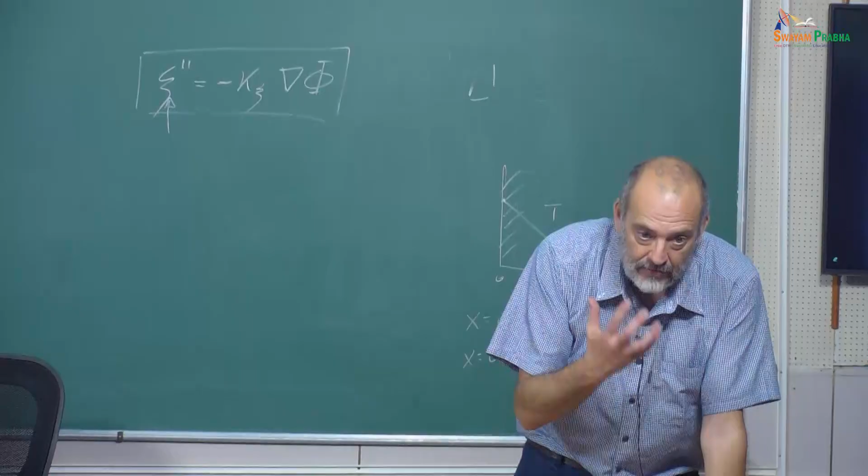Okay, so when you have a phase change, we are going to have mass that is moving in one direction or the other; it can be also condensation. So, for example, you have condensation: you are producing a droplet because you have a condensing vapor. This means that the mass of vapor is going to the droplet, so there is a movement. So we need to consider the momentum that is created by the fact that part of the mass from the vapor is going to the droplet.

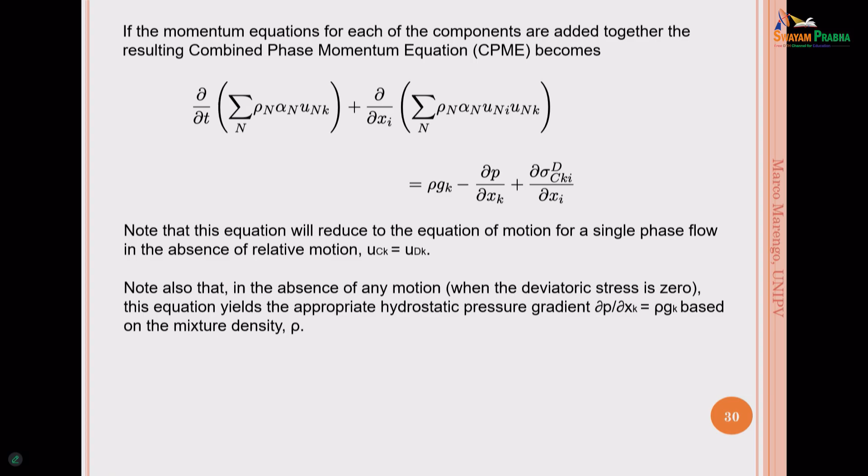This was not considered before; it was a single phase. Is it okay? Okay. If the two phases are the same, we can say that at the end we are going to land, of course, in the direction of the single phase solution. Okay. So consider now a dispersed phase momentum conservation.

So we are going to have the total derivative of the momentum flux, and in this part we have the momentum that is linked to the mass exchange, and it is equal to forces. One is the gravitational force. Do you remember what I said before about the forces in two-phase flows? Which was the other one that is also very important? Due to the difference of density, remember? So we have buoyancy. This is again something that we need to consider.

So the buoyancy forces are really important in this case because, for example, bubbles in gravity, when the difference of density is important, are moving inside the system. So we need to understand this, but there is another one that is not written, but I can anticipate: if you have particles or bubbles or droplets moving inside, there is another force that is created by the viscosity, which is the

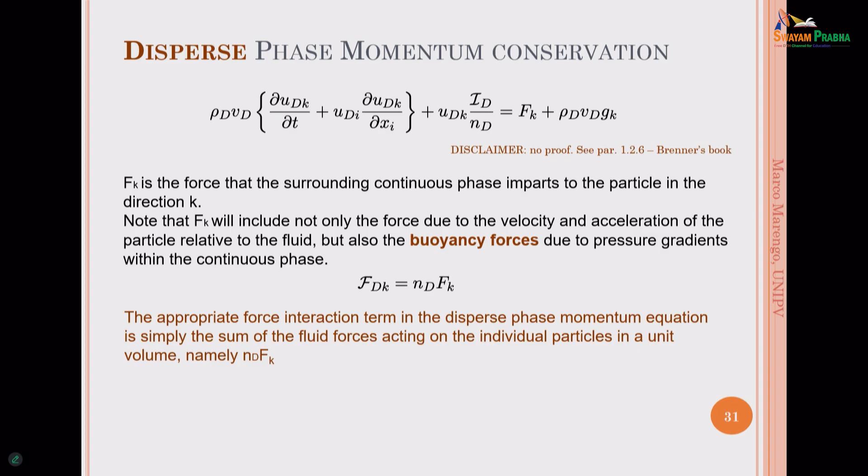So in fact, you have other stresses inside the liquid that are produced by the interaction with the gas. You start to understand that it's a mess. So we are always doing something with simplifications. Here I'm presenting the most general equations. On Thursday, we are going to look at specific cases. But here I need to put everything together in order to give a kind of umbrella, and then we are going to see.

Pause. Okay? The 5 minutes, sorry, but otherwise we don't have time. I can recover a little bit on Thursday, but it's better to finish at least this part today. Okay, so are you okay?

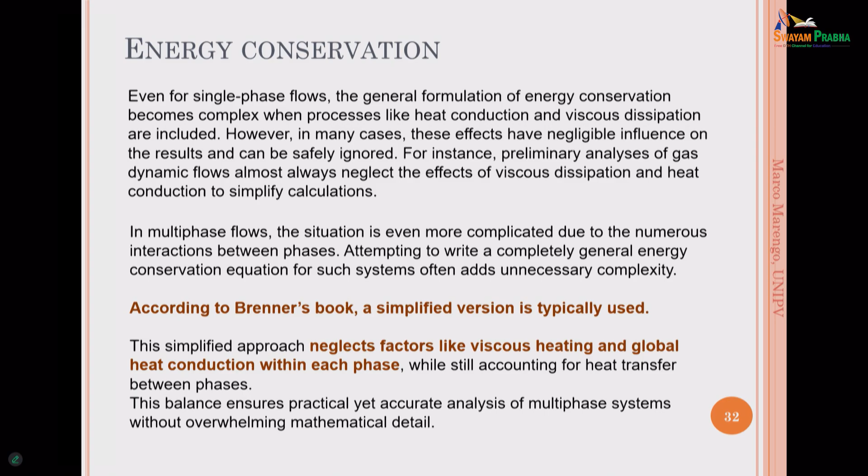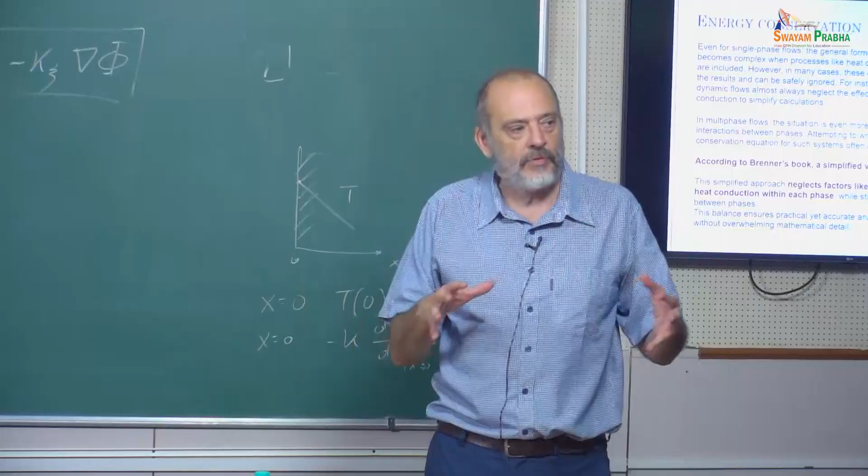So the big difference with respect to the single phase is that the mass interaction terms are really very important, and I bring these mass interaction terms with me. And also the forces are changing, because there are forces due to the fact that we have another component. This is the major message. Mathematically it can be complex, but we will see that it's not so complex when you write down the equations in explicit form. But in a comprehensive form, this is the way to say it. Is it okay? Okay.